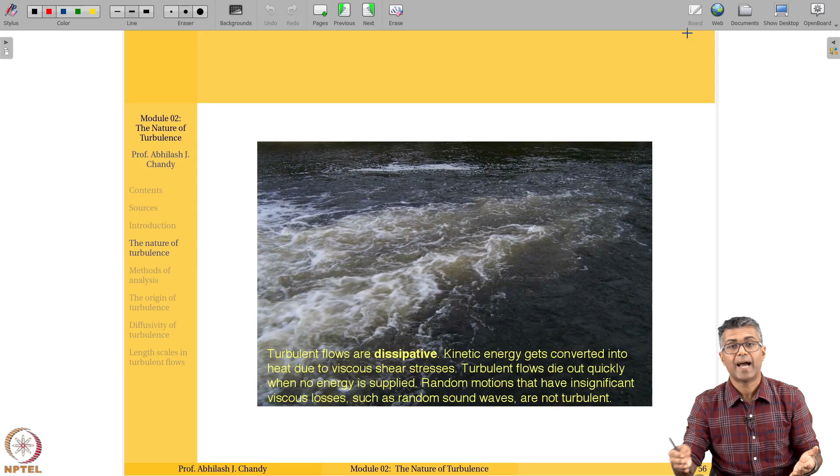Eventually the turbulence just decays completely. Unless you have a continuous supply of energy, the energy is just going to completely die down, decay because of viscous work. So for turbulence to remain, you will need to have a continuous supply of energy. That's what we mean by that.

The major distinction between random waves and turbulence is that waves are essentially non-dissipative, though they are dispersive. Dispersive means they have fluctuations, irregularity, while turbulence is essentially dissipative.

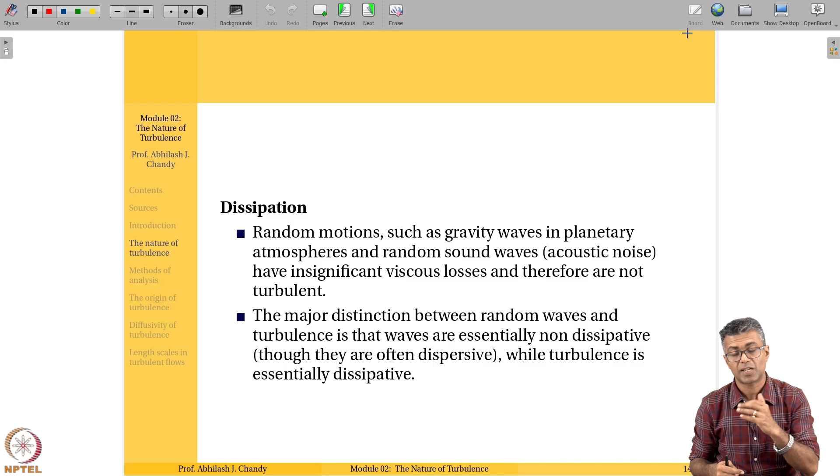Examples of non-dissipative flows would include random motions such as gravity waves in planetary atmospheres and random sound waves, acoustic noise. They are extremely dispersive. They look chaotic, but they have insignificant viscous losses, and therefore they are not turbulent. So that's an example of dissipation, another important attribute.

So, 5 main attributes: diffusivity, irregularity, large Reynolds numbers, 3-dimensional vorticity dynamics, and dissipation. These are the 5 main attributes of turbulence.

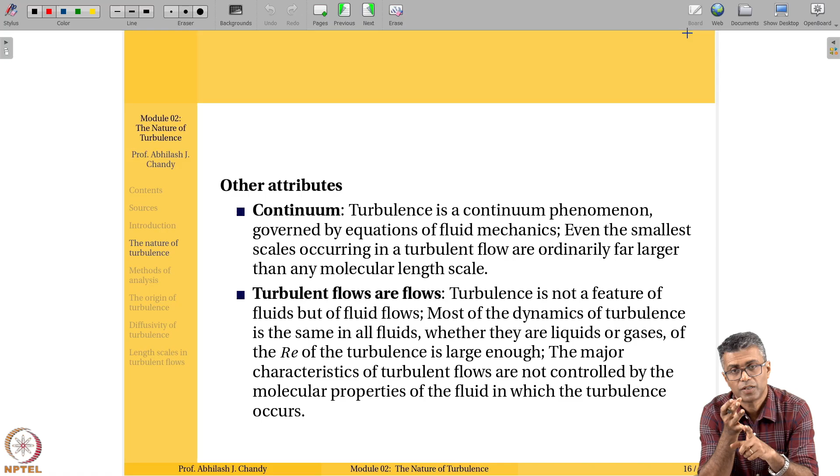There are some other attributes that we can focus on as well. One is continuum, and continuum has to be mentioned because we are dealing with fluid flows. The continuum hypothesis is always there. It might seem trivial, but it still has to be mentioned as one of the attributes. I have described the continuum hypothesis already.

It refers to the fact that we are not looking at molecular scales. We are looking at macro scales, fluid particle scales, where the scales under consideration are still much larger than the molecular length scales.

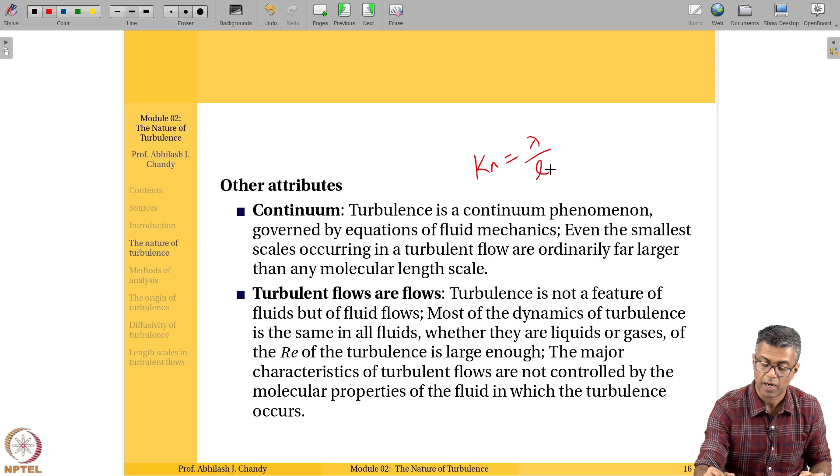For example, if you look at the Knudsen number, that is an example that determines whether the continuum hypothesis is valid or not. The Knudsen number is a ratio of mean free path to the characteristic length scale. This number has to be much less than 1. So Knudsen number, which is equal to lambda over L, has to be much less than 1. Then the continuum hypothesis is valid.

Another attribute not talked about enough is the fact that turbulent flows are flows. What does that mean? What we are trying to say is it is not a feature of the fluid. It is not a molecular property. It is a flow property.

So essentially most of the dynamics of turbulence is the same in all fluids. It doesn't matter what the fluid is. It can be a liquid, it can be a gas, it can be an extremely thick liquid, it can be an extremely thin liquid, it can be any kind of gas, as long as the Reynolds number is large enough.

Again, Reynolds number is a flow property. Yes, it is dependent on the viscosity. But that Reynolds number alone determines whether the flow is turbulent or not. So turbulent flows are flows, and it is not a turbulent fluid, it is a turbulent flow. The major characteristics of the turbulent flow are not controlled by the molecular properties of the fluid in which the turbulence occurs.

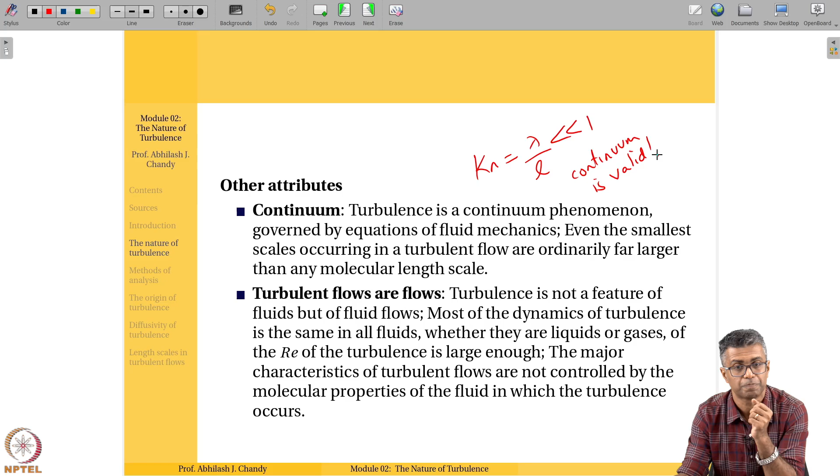No general solutions are available. You cannot have a general solution for a turbulent flow, which means every turbulent flow is different. It doesn't matter what the fluid is - turbulent flows are flows, it is not a feature of the fluid. So that's what we mean by that.

The characteristics of turbulence depend on the environment. It does not deal with all kinds and types of flows in a general way. We don't have a theory that deals with all kinds of flows. What we do is try to focus on a family of simple kinds of flows.

What we try to do to understand this kind of flow is look at fairly simple flows, say flow over a cylinder, to get a better understanding. This is because you cannot have a theory that deals with all kinds of flows, so we tend to focus on families of flows with simpler boundary conditions.

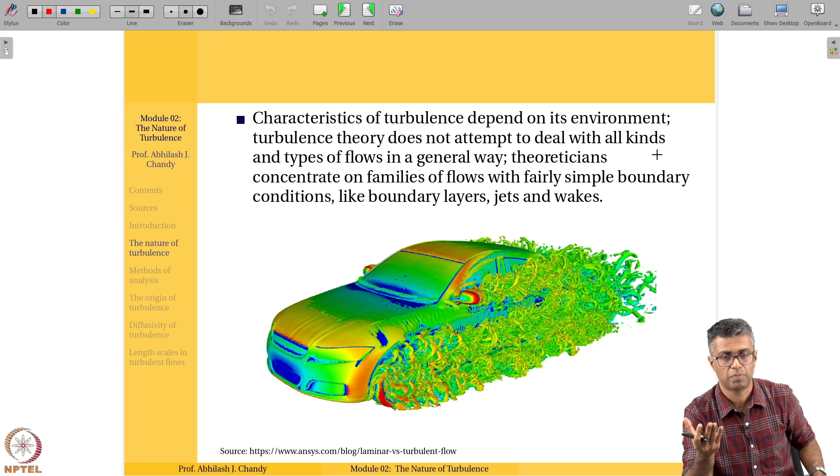So that takes us to the methods of analysis. We have looked at the different attributes - the two additional attributes, in addition to the five main ones, were continuum, and the fact that turbulent flows are flows and not fluids.

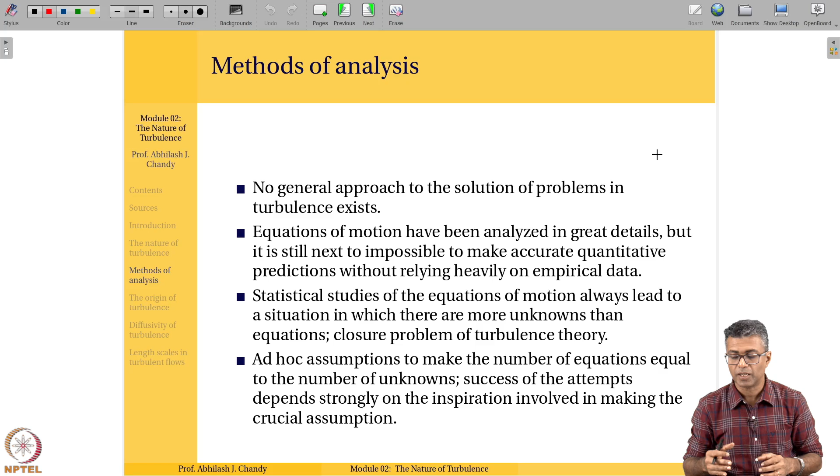So that takes us to the methods of analysis. This links well with what I was saying earlier - you cannot have a general solution for turbulent flows. No general approach to the solution of problems exists. We have equations of motion that have been analyzed in great detail, but you still cannot make accurate quantitative predictions without relying on some kind of experimental data.

This ties in with what we discussed in module 1, where we looked at the three different eras in which physicists have looked at turbulence: the statistical, the deterministic, and the structural. You will need some kind of experimental data to back your theory, because everything cannot be described by a theory.

The next point here is statistical studies - that is the statistical approach. The statistical studies of the equation of motion - we will actually derive the statistical form of the Navier-Stokes equations, the mean of the Navier-Stokes equations. In such a scenario, you will have more unknowns than equations, and that leads to what we call the closure problem in turbulence - you will have terms that cannot be described.

Then you will need assumptions for that. This comes about when you try to take an average of the equations - empirical data is required. At the same time, if you try to draw statistics, draw the mean, the equations will lead to a point where there are more unknowns than equations. Then you will need assumptions for that.

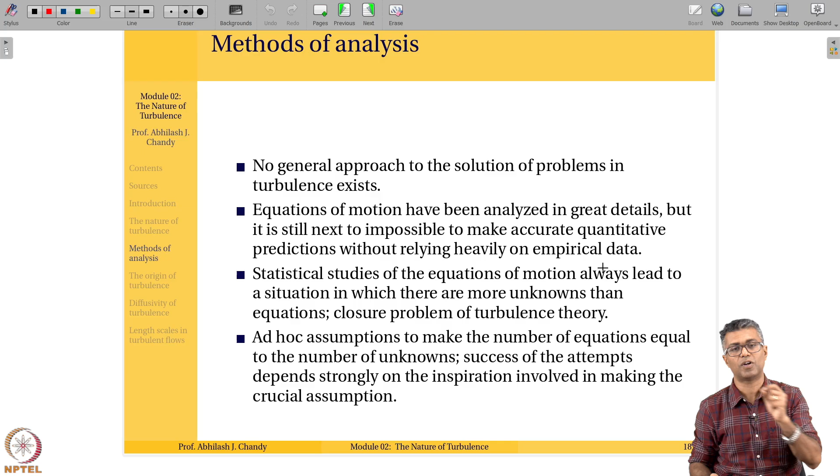This has led scientists to come up with ad hoc assumptions just to make the number of unknowns and equations the same. Some have been successful, but the success of those attempts depends on where the assumption is coming from - it strongly depends on the inspiration involved in making a crucial assumption. We'll talk about some of the assumptions as well.

To gain a better understanding of this, we must be willing to use simple physical concepts, even if it means trying to understand a fairly simple flow with simple boundary conditions. We have to try and bridge the gap between equations and actual flows. According to Tennekes and Lumley, what we need is spirited inventors just as badly as dedicated analysts, and the model need not be complete, but it can still be useful.

Even to this day, no model is complete. However, there are models still being used today that have very ad hoc assumptions that work reasonably well, that give us a good understanding about turbulence. So that's what we mean by it can still be useful - it doesn't have to be complete all the time.

Case in point, the eddy viscosity hypothesis - molecular versus eddy viscosity. I have talked about this. If I look at Newton's law of viscosity that deals with stress versus strain, I have tau equals mu du dy.

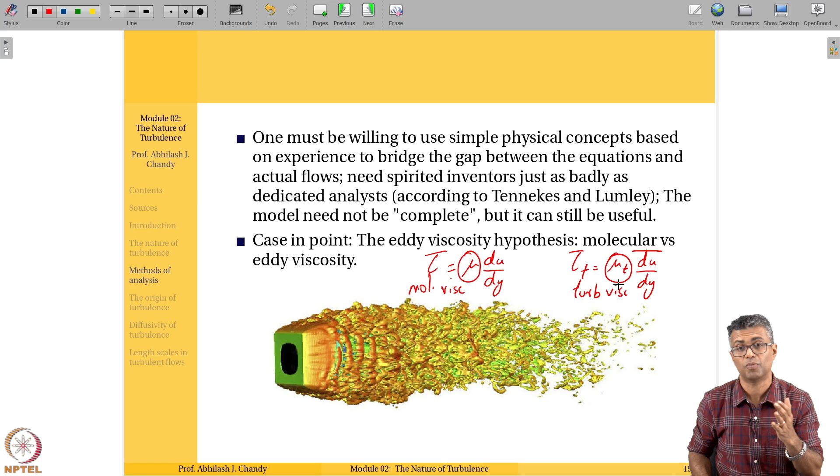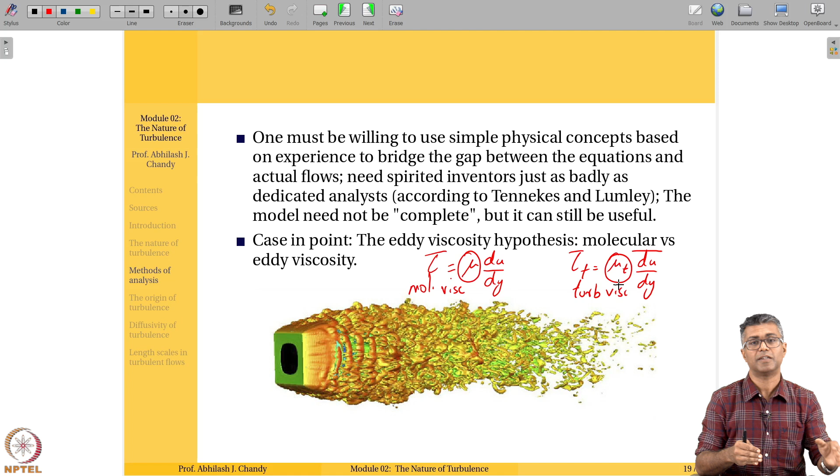An additional point: the eddy viscosity hypothesis brings an analogy between eddy viscosity and molecular viscosity. Molecular viscosity is a molecular property, a fluid property. This contradicts one of the attributes of turbulence, stating that turbulent flows are flows and not fluids. It's not a turbulent fluid, it's a turbulent flow. When you use an analogy from molecular viscosity, a quantity like eddy viscosity analogous to a fluid property, to describe turbulence, you are kind of violating that particular attribute.

Other methods of analysis include dimensional analysis, the basis you'd have learned in fluid mechanics, the Buckingham Pi theorem. Dimensional analysis has a huge role to play in understanding turbulence, one of the most powerful tools. The idea is some aspects of turbulence can be learned purely through a few independent variables, and dimensional methods often dictate the relationship between dependent and independent variables. If you non-dimensionalize it, you can try to understand something about the structure of turbulence. An example is the inertial subrange of the turbulent kinetic energy spectrum, which I'll show through a picture shortly.

Next point, asymptotic invariance. Turbulent flows are generally at high Reynolds numbers, that is one of the attributes, so proposed descriptions should behave properly as the Reynolds number tends to infinity. An example is Reynolds number similarity in turbulent boundary layers: turbulent flows tend to become almost independent of viscosity as the Reynolds number keeps increasing. So at very high Reynolds numbers, all turbulent flows look the same, meaning certain specific quantities behave in a similar way. That asymptotic invariance is what we are saying, they tend to have an asymptotic behavior as the Reynolds number tends to infinity.

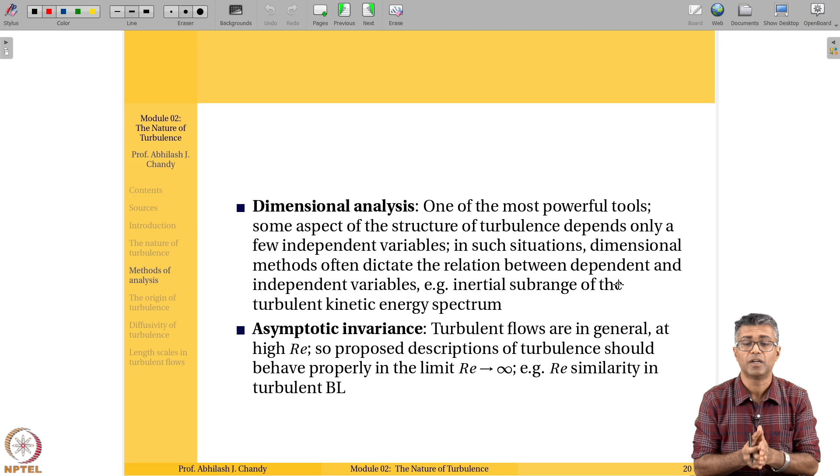A simple example: there might not be any difference in the flow when you look at the Reynolds number of a jet, hypothetically, whether it's 1 million or 2 million. When the Reynolds number is that high, tending to infinity, the flow tends to be similar.

Local invariance is another method used for analysis. The characteristics of turbulent motion at some point in space and time appear to be controlled by the immediate environment, and it is dynamically similar everywhere if you non-dimensionalize it with the local length and time scales.

This picture shows how we can use scaling laws to non-dimensionalize things. This has to do with dimensional analysis as well, and the fact that it is locally invariant. You can use scaling laws to try and draw a similarity between different kinds of turbulent flows.

What is shown here is a turbulent energy spectrum. Some of these quantities we have not dealt with, but for now just understand this as a turbulent energy spectrum. On the y-axis I have E11, indicating that it is a 1D energy spectrum, taking the energy due to one velocity component and the spectrum of that.

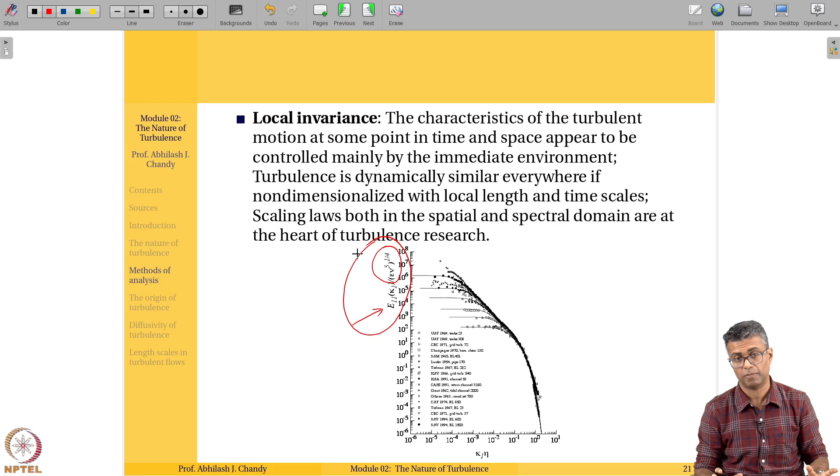Similarly, on the x-axis I have wave number kappa multiplied by eta, which is the Kolmogorov scale. I will describe all these quantities in the next module, but for now just understand that the x-axis and y-axis are non-dimensional, using very specific scaling laws.

I'm not just arbitrarily bringing up some quantities. These are very specific scaling laws that match with what is being plotted. And if you see, I have a whole set of data here. All of these are experimental data.

I know the legend is not very clear, but understand that there are multiple sets of data here—1, 2, 3, 4, 5, 6, say for example. All these data are from different kinds of flows: some are from jet flows, some are from wake flows, some are from flow over a cylinder, flow over a flat plate.

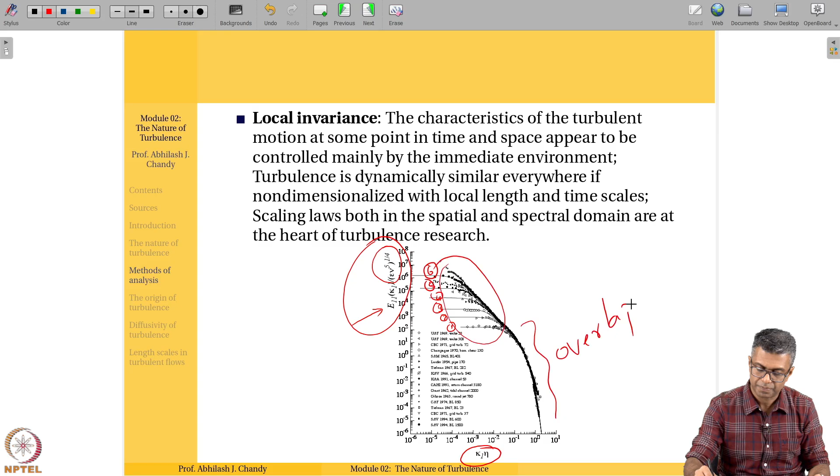All are turbulent, by the way. What you will notice is that except for the initial part, there is a complete overlap of the data. Towards the right of the plot, there is a complete overlap of data. So that invariance is what we are talking about here—that is the local invariance.

We used dimensional analysis and certain scaling laws to demonstrate that turbulent flows are invariant if scaled by the right quantity. The non-dimensional value is invariant, as you can see. No matter what the data is, as long as the flow is turbulent, they completely overlap on the right. That is what I mean by local invariance.

So we looked at these different methods of analysis, right? We started with dimensional analysis and we will see examples. So I had asked you to hold on to that thought.

The inertial subrange is something I had mentioned. The inertial subrange of the turbulent kinetic energy spectrum—this right here is what we refer to as the inertial subrange. How do I know that? The description will come up in the next module, but keep in mind that the inertial subrange overlaps entirely no matter what the flow is.

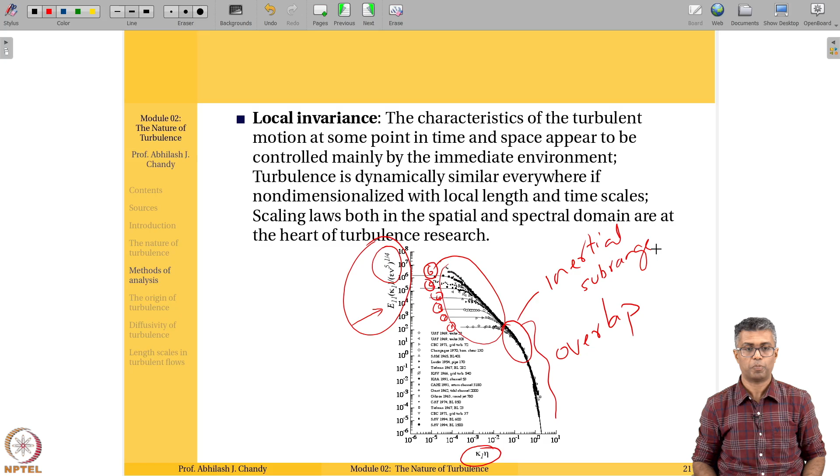In the next class, we will look at the origin of turbulence and we will start to focus more on the diffusivity of turbulence. Thank you.